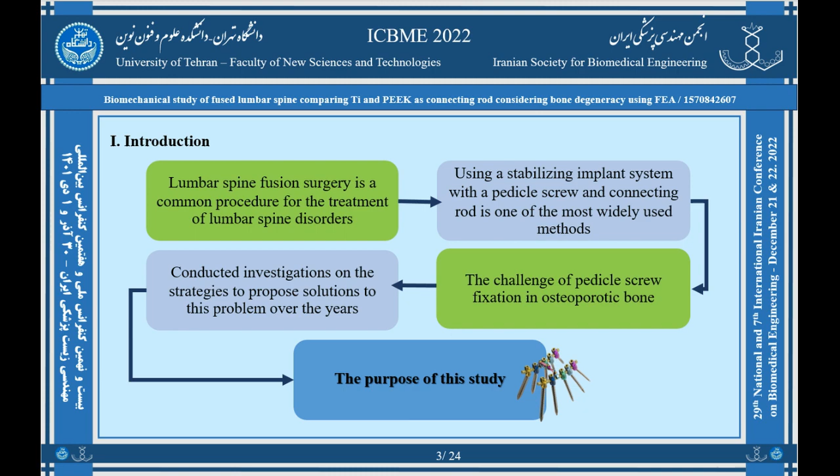First, we trace the indicators that form the purpose of this study. Lumbar spine fusion surgery is a standard procedure for treating lumbar spine disorders. Using a stabilizing implant system with a pedicle screw and connecting rod is one of the most widely used methods, but the challenge of fixing the pedicle screw in osteoporotic bone has always been one of the obstacles in this type of surgery. Over the years, there have been investigations into strategies to provide solutions to this problem. And all these issues together constitute the purpose of this study.

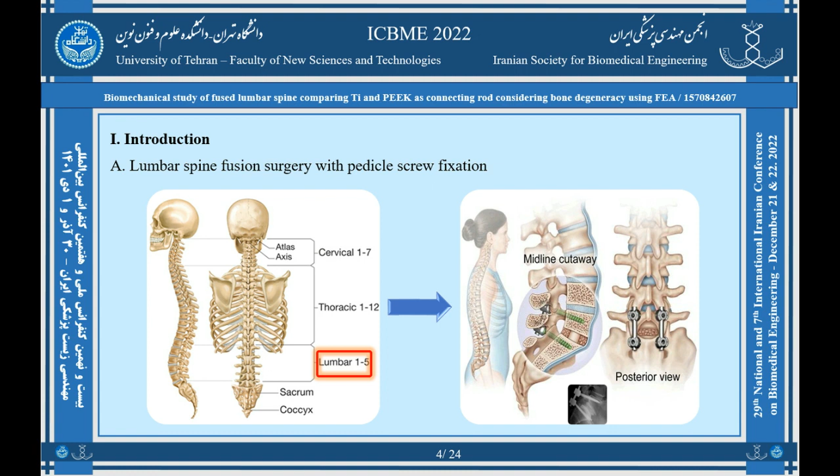The purpose of fusion surgery in the lumbar spine area is to treat problems such as lumbar disc, spinal tumor, spinal fracture, scoliosis, spinal canal stenosis, and similar problems. The reasons that make this issue very important are as follows. The importance of the spine in maintaining body strength, protecting the spinal cord, and human movement. The prevalence of fusion surgery in the lumbar spine area.

The increasing prevalence of osteoporosis. The silence of osteoporosis until the first fracture. Vertebrae is the most common fracture site due to osteoporosis. Lack of studies on effective issues such as geometry and materials of implants used in fusion surgery. The need to improve the quality of fusion surgeries.

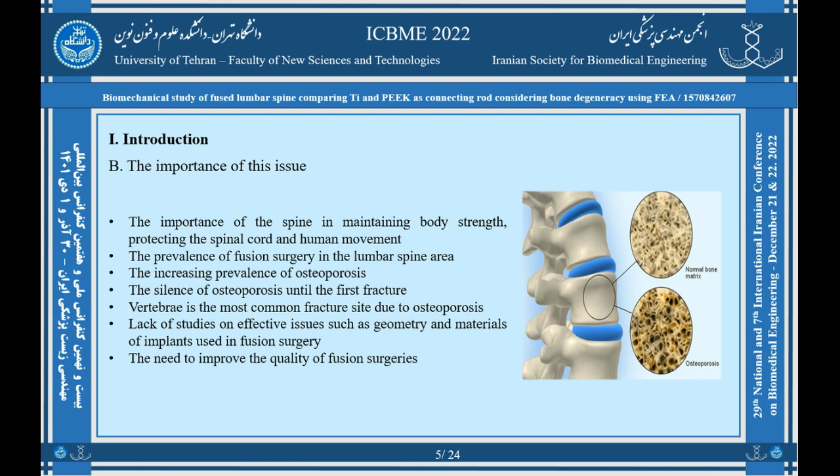There are previous studies in this field, some of which I will present to you as selected ones. Jost et al. and Werner et al. in their research in 1998 and 2019 concluded that fusion surgery in osteoporotic bones is much more complicated than in healthy bones. Lo et al. in 2003 announced that osteoporosis leads to higher stress concentration in the annulus fibrosus, articular facet, and lamina.

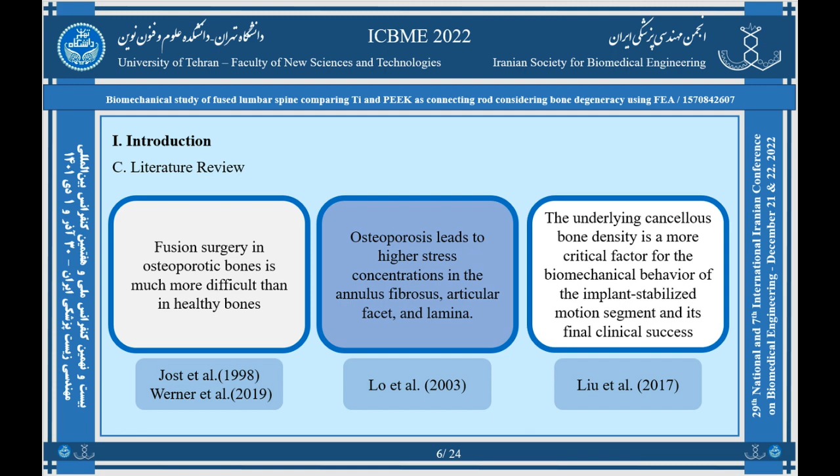Liu et al. in 2017 stated the underlying cancellous bone density is a more critical factor for the biomechanical behavior of the implant stabilized motion segment and its final clinical success. Biswas et al. in 2018 and Akinci et al. in 2022 compared the types of titanium alloys, polyether ether ketone, and polyethylene for connecting rods and investigated their effectiveness.

Oikonomidis et al. in 2020 investigated two types of fixation systems, titanium screws and rods and PEEK screws and rods, on the corpse of a person with osteoporosis. Nico et al. in 2021 investigated the effect of connecting rod material in the parametric model of fusion surgery. And the purpose of this study is to investigate the effect of the selected material for the connecting rod in fusion surgery, considering the reduction of bone quality.

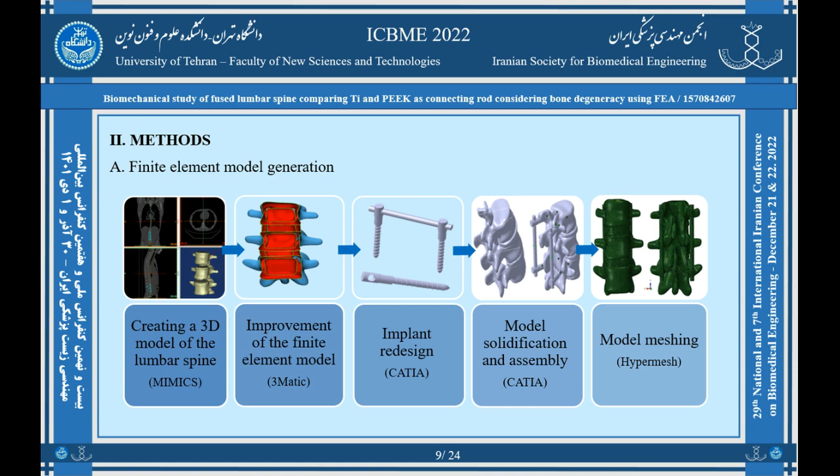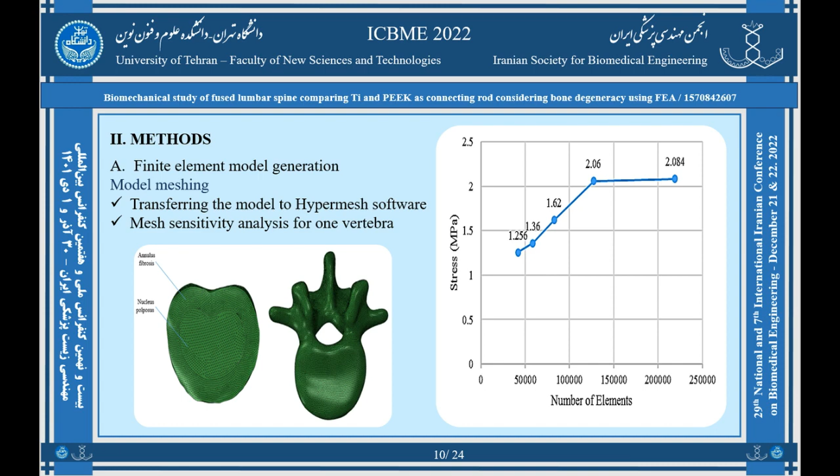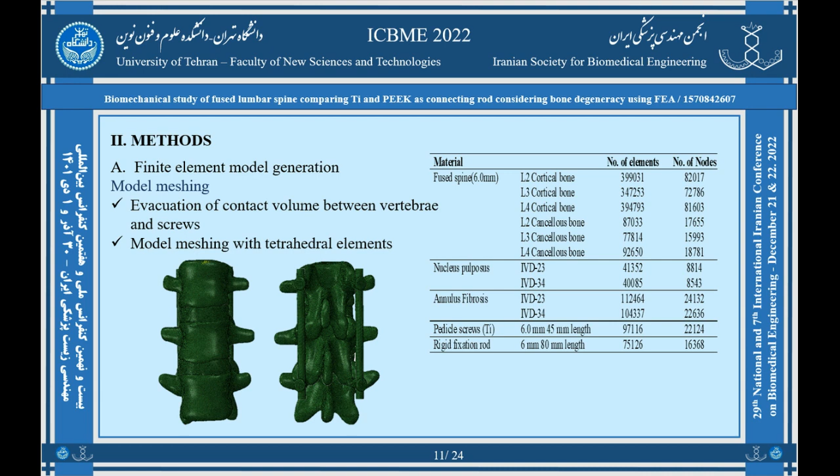After analyzing the sensitivity of the mesh due to the sharpness of the threads of the pedicle screws, the value of 0.75 was chosen for the sides of the element so that we do not have any distortion in shape. The number of elements of the fully assembled model is in this table. The tetrahedral element is used and the pedicle screws and vertebrae contact volume is evacuated from inside the vertebrae. The model was transferred to Abaqus software as an orphan mesh.

The material allocation was done, and 4 types of quality for the cortical part and 4 types of quality for the cancellous part were used to represent osteoporosis in the model. Then, the interaction between the parts was applied according to this figure.

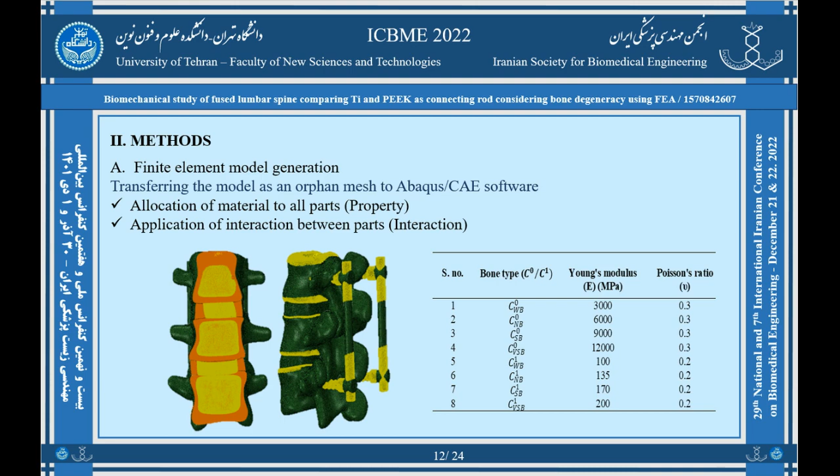Finally, 4 types of movement: flexion, extension, lateral bending, and twisting; 4 types of bone quality: weak, normal, strong, and very strong; and 3 body weights were considered for model analysis compared to 2 cases with a titanium rod and a PEEK rod.

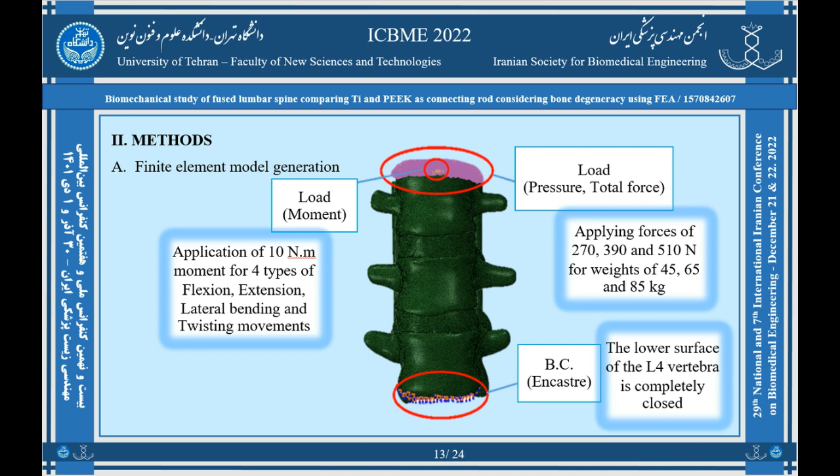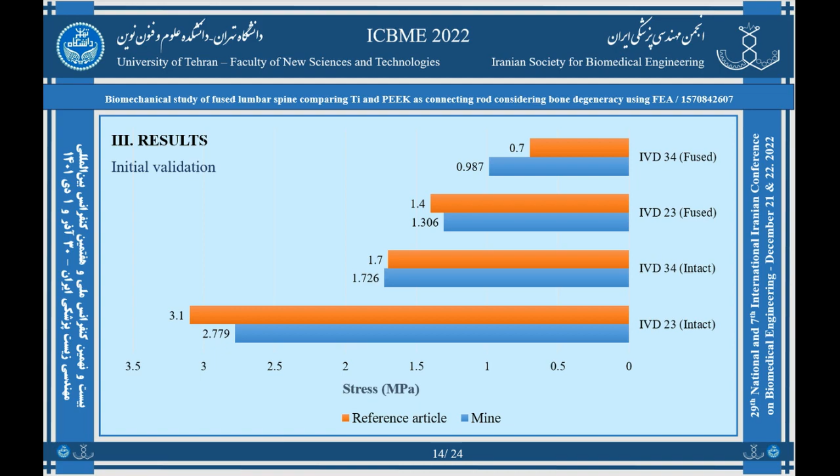According to the initial validation to ensure the model's accuracy, the results indicated that in both fused and intact states, the stress concentration in the intervertebral discs with an average error of 13% is consistent with the study of Jain and Rajik Khan. As seen in the diagrams for the model with PEEK connecting rod, the stress concentration in the whole model has decreased significantly with a decrease in bone quality.

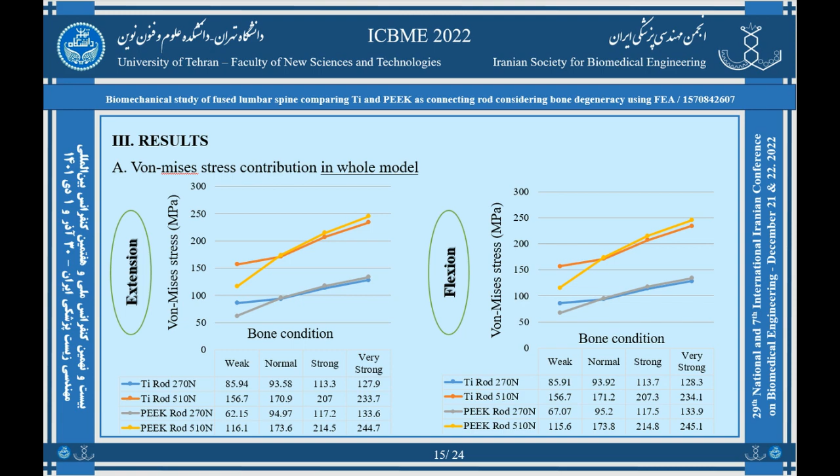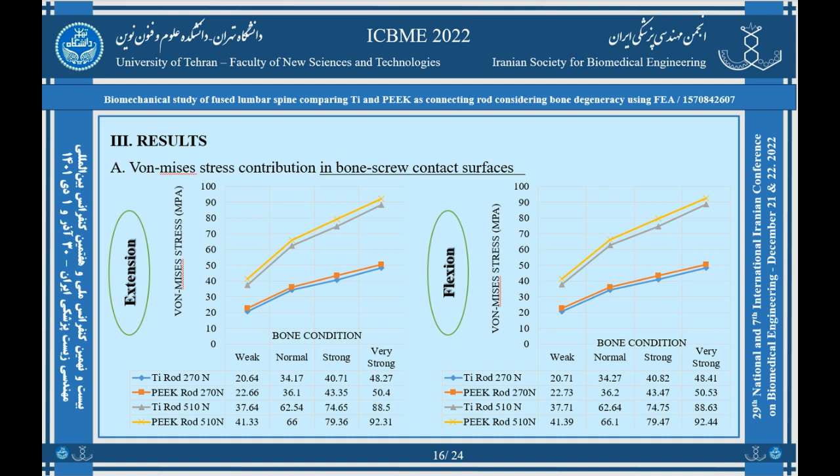The diagrams of flexion and extension can be seen in the slide, and the other 2 modes are available in the main text of the paper. Also, this reduction can be seen for the screw and bone contact surfaces. When bone quality decreases, both types of titanium and PEEK materials for the rod show a significant stress reduction.

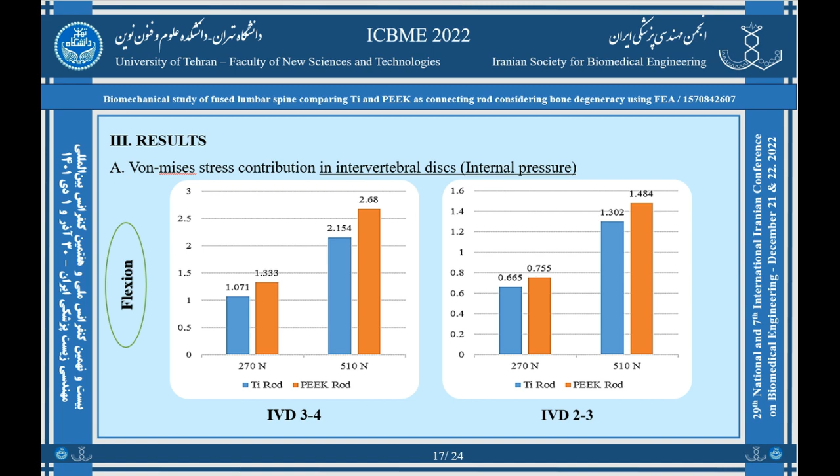The internal pressure in the intervertebral discs in the model based on the PEEK connecting rod is slightly higher than in the model based on the titanium connecting rod. Furthermore, the load displacement relationship of fused cases under varying load conditions during flexion, extension, lateral bending, and twisting is also rendered. This graph shows load displacement behavior concerning the effect of compressive loading under various body movement conditions in the whole model.

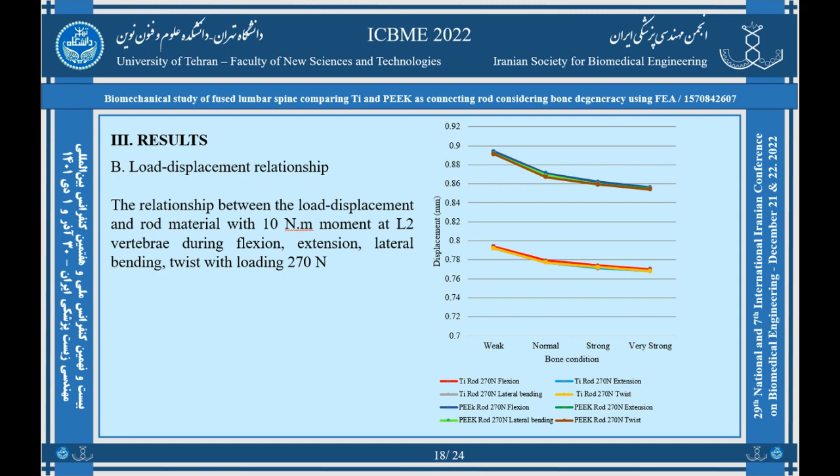For flexion, extension, lateral bending, and twisting, the displacement of the entire model varies from 0.77 to 1.635, 0.768 to 1.634, 0.768 to 1.633, and 0.768 to 1.633 mm respectively.

With the process of reducing bone density in both the dense and spongy parts of the whole model, the PEEK-based model for the connecting rod has a lower stress distribution at the contact surface of the screw with the bone, reducing the bone quality. PEEK material is more suitable for the connecting rod, but in good quality bones, titanium is preferred.

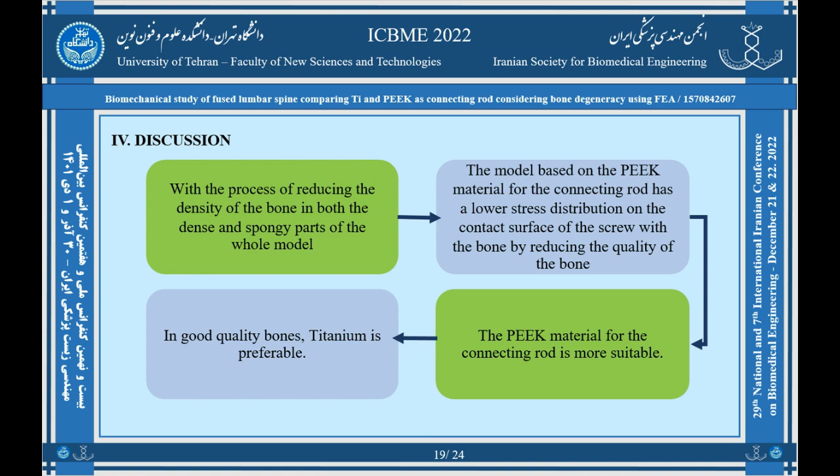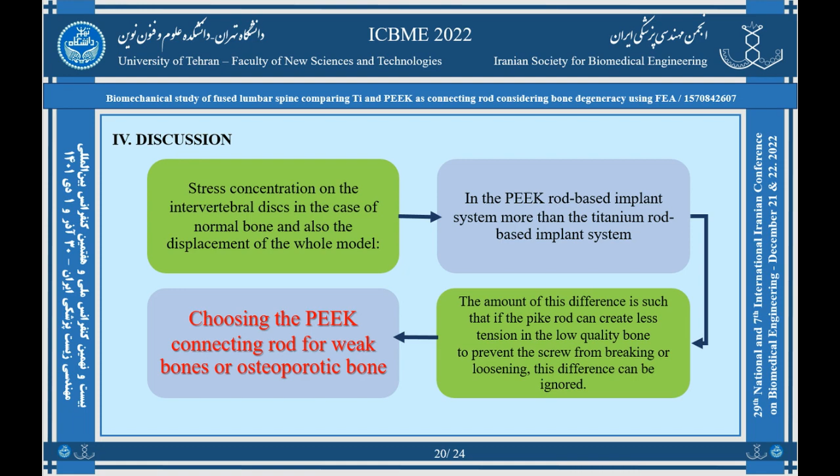The stress concentration on the intervertebral discs in the case of normal bone and the displacement of the entire model is higher in the PEEK rod-based implant system than in the titanium rod-based implant system. The amount of this difference is such that it can be ignored if the PEEK rod can create less stress in the poor quality bone and prevent the screw from breaking or loosening. Therefore, choosing a PEEK connecting rod for weak or osteoporotic bones is justified.

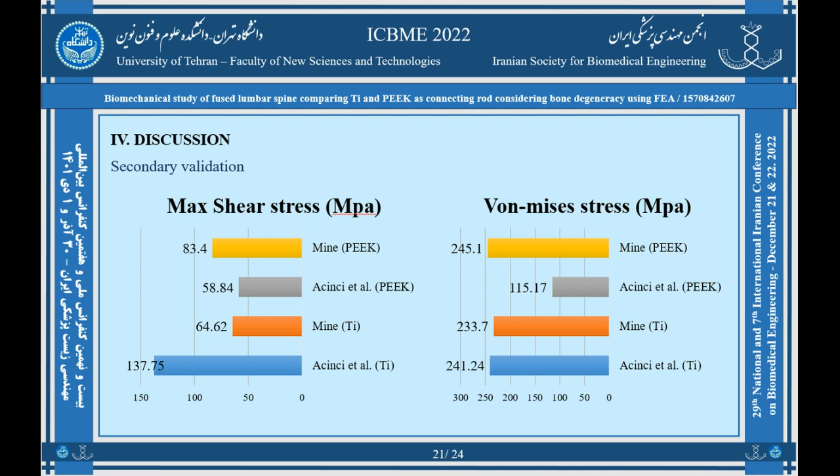Secondary validation was also done with Acinci et al.'s model, which is in good agreement due to the difference in segments and incoming forces. As a general conclusion, I can offer you the following. 1. The maximum stress on the titanium connecting rod and PEEK is 110.8 and 9.366 megapascal respectively. Titanium and PEEK yield strength is 800 and 102 megapascal respectively. So we have a safe distance between the obtained stresses and the yield strengths in the connecting rod even at higher weights and similar movements.

2. Also, the results obtained from this study, in addition to paying attention to the surgeon's diagnosis regarding the possibility of increasing osteoporosis in patients undergoing lumbar spine fusion surgery, can provide surgeons with the possibility of replacing the stabilizing implant system based on the PEEK rod with the stabilizing implant system based on the titanium rod. And these are some of the prominent references for this study that have been used in this direction.